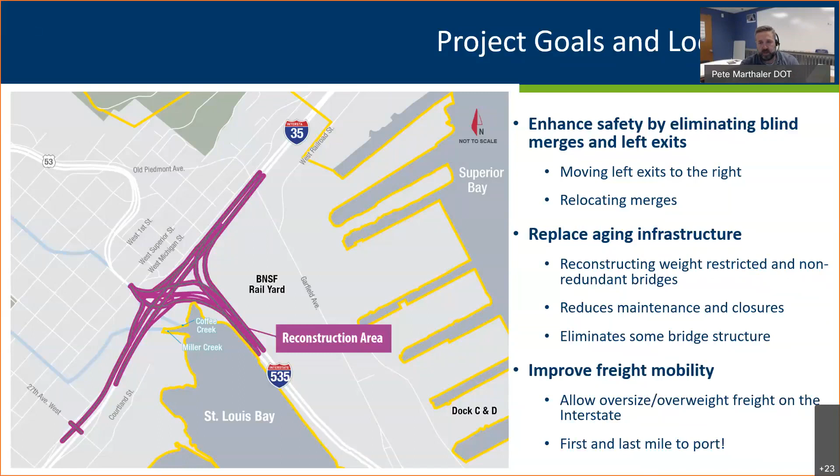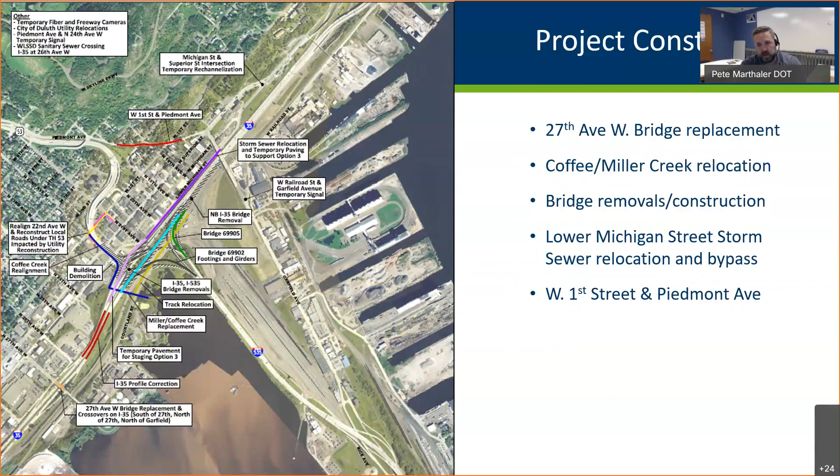Project construction will, for the first phase we're starting to see right now, include the 27th Avenue West Bridge replacement. We'll also relocate and combine Coffee and Miller Creek. We'll have some bridge removals that will start next fall, or major bridge removals that'll start next fall. And next summer we'll have Lower Michigan Street storm bypass and some small utility work at West First Street and Piedmont Avenue.

For work pack 2, as we see in the map here, a lot of the newer bridges will come online. Mainline reconstruction of I-35, putting in some ground improvements and retaining walls, and working through our stage construction to maintain traffic on I-35.

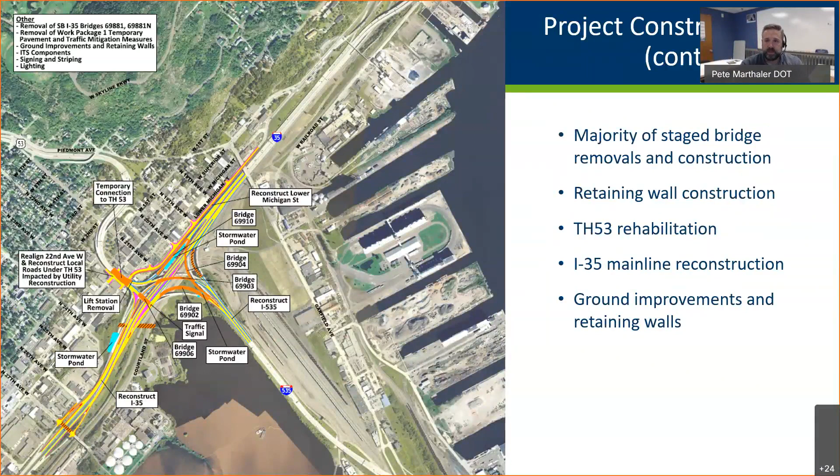So probably the reason everyone's here is they're looking to understand what our fall work is, and understanding some of the work that we have out there that's underway right now as we speak.

So our scheduled work for fall is 27th Avenue West Bridge replacement. We completed our crossovers on I-35 mainline last week, which is a good hurdle to get over, given that we want to be able to utilize those right away as soon as we start spring construction.

We're going to work on some railroad track alignment between WLSSD and the heart of the TPI interchange, and we're demoing some buildings that are in the way for our spring construction.

We'll start with some bridge foundations in the main heart of the interchange, represented by those red dots you see down here.

And we'll start building our soil stockpile sites. As we have a significant amount of contaminated soil, we're managing that and identifying what we are allowed to reuse through the PCA. So we have to have some temporary stockpile locations around the vicinity. We're going to get those lined up and built so they're ready to go come spring.

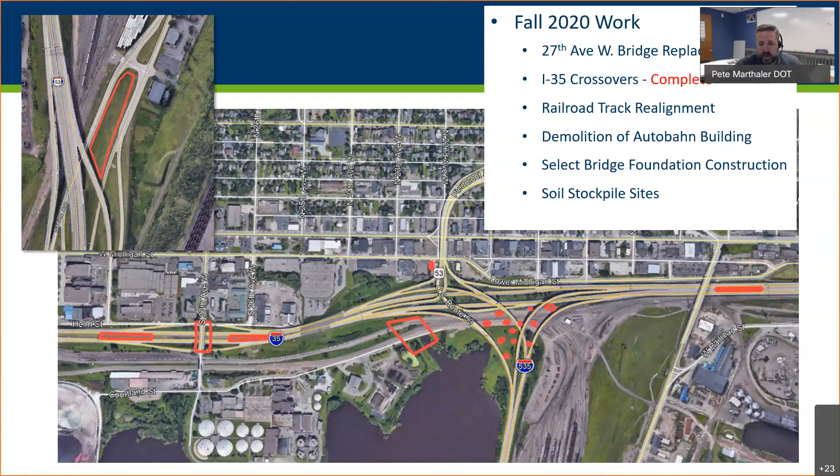Touching on the crossovers again, if you've driven up and down the freeway, you've probably seen the work that we've completed over the last 2 weeks. The nice part about it, at least I can speak about today, is that we have southbound traffic open to 2 lanes in both directions. And hopefully by midweek this week, we will have northbound back open to 2 lanes.

We have some work going on right now at the 27th Avenue West Bridge, as well as some work going on the shoulder. If you can see my cursor here, circling the area off the right shoulder, northbound on I-35, that is also some temporary work that we're getting completed this fall to line us up to be in a good position come next spring.

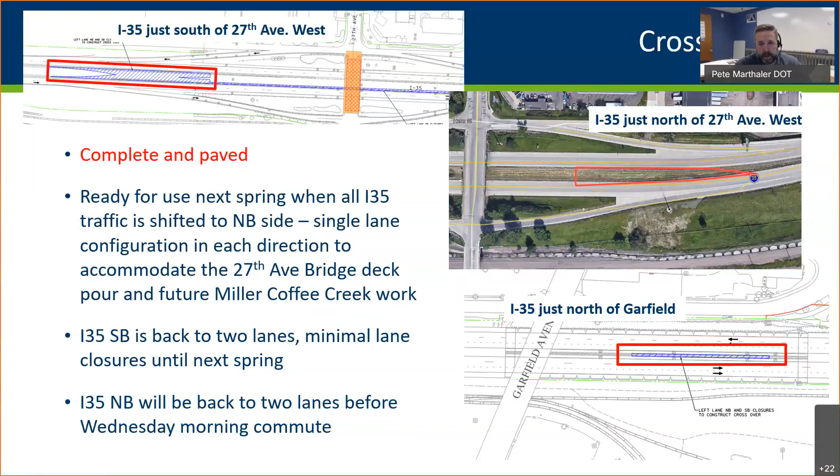Here's a picture of our crossover on the north side of 27th Avenue West, and our crossover under construction on the south side or west side of 27th West.

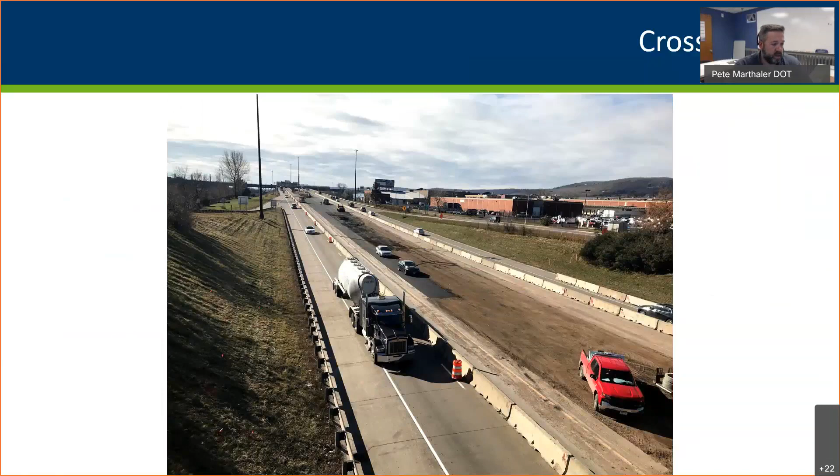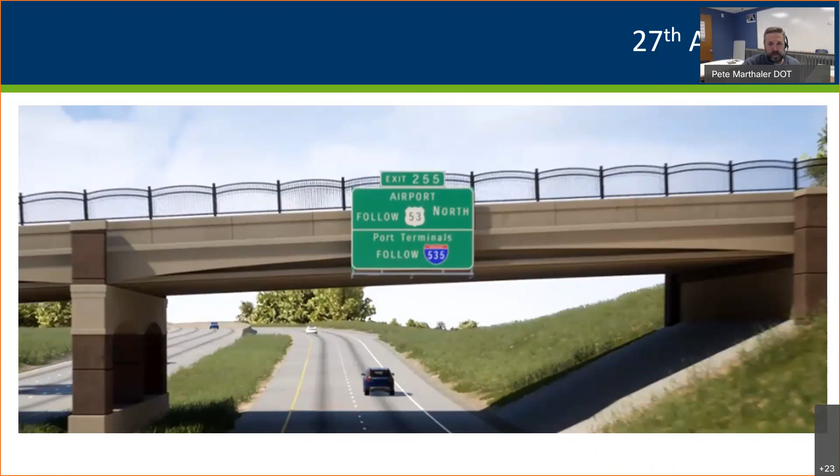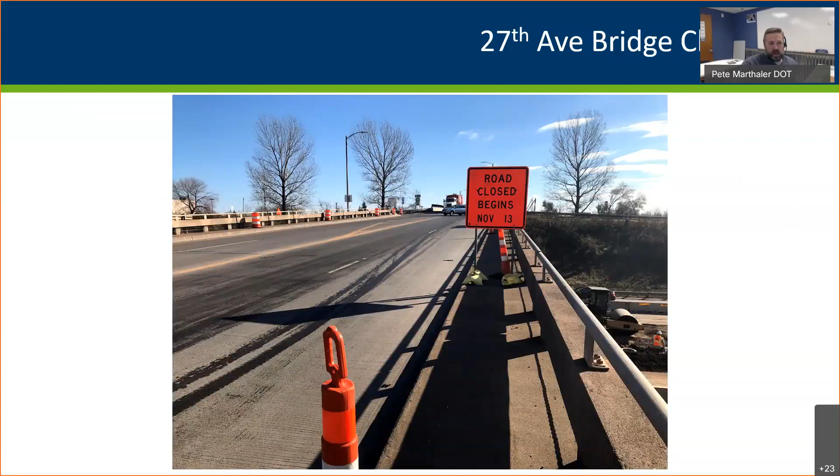So this probably is a good time as any now that I realize this. Steve, this is kind of what, good way to step through the stage construction. So you want to jump in? Sure, can you hear me okay, Pete? Yes, we can hear you good. Thanks, okay, no, thank you very much.

So I'll just talk about what we're doing here at 27th. For those that may have been out here this morning, we've got the two north side ramps, the northbound on-ramp from 27th Avenue and the southbound off-ramp from 27th Avenue, closed. What we're doing there right now is getting some temporary earth retention or shoring systems installed in preparation for the demolition weekend on November 13th. Those ramps will be closed for the remainder of this week to allow us to do that work.

There's also some temporary lighting that needs to get installed and rerouted. So there's some temporary poles that will get installed on the east side and west side of 35, and that's just to allow for some temporary lighting just north of there for temp widening work that is ongoing concurrently at the same time.

And then starting next Monday, we'll open the two ramps that are closed today and close the two south ramps, again to do the similar type work. We've got some temp lighting that we've got to install, and then some temporary shoring in preparation for the bridge removal starting November 13th. So we've got two ramps closed this week and the two south side ramps closed next week, and that will lead us into Friday, November 13th.

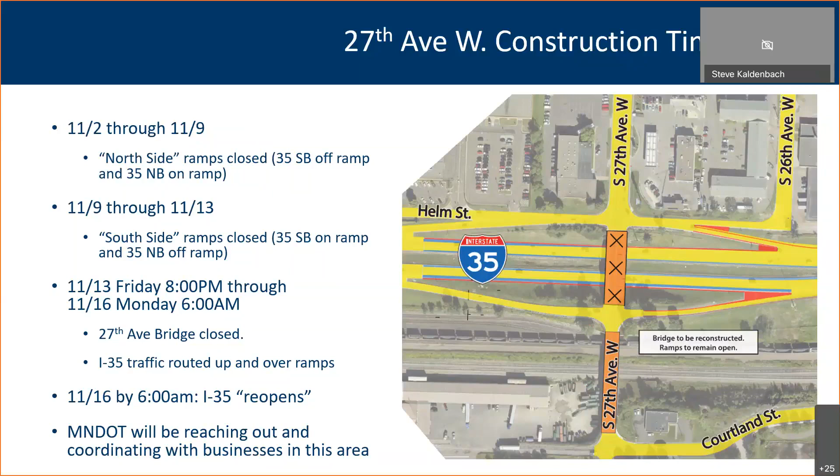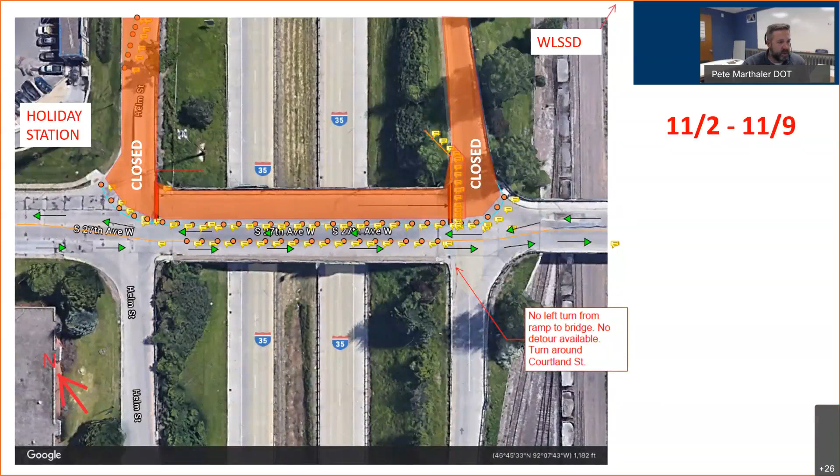So to put some pictures to words of what Steve was just talking about, this is the overhead view of the configuration that we have out there right now, and why we're closing. The orange area is the work zone that's underway right now, and the barrels, the orange dots, kind of delineate the traffic channelization that's going on. So this is what we'll see for this week, and then on Monday we'll flip flop them so they will look like this.

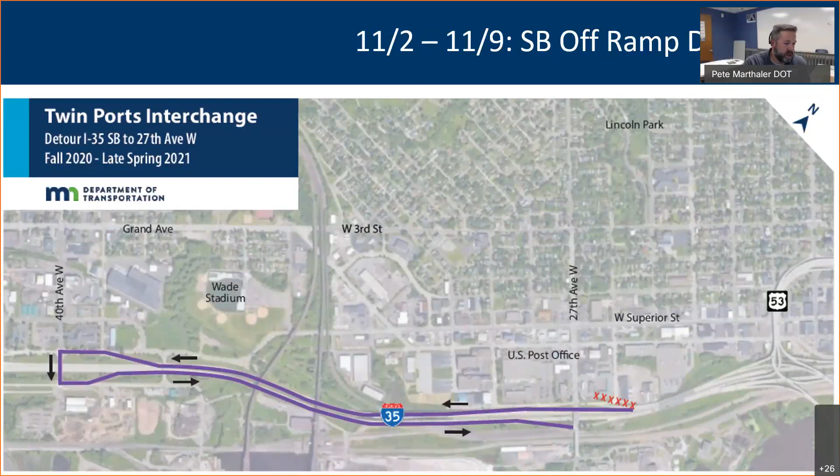And in the meantime, we don't have signed detours out there, but we're asking people who know where they need to get to, if you want to access the southbound off ramp detour, given you can't take the ramp off, go southbound to circle down to 40th and come back north, utilizing the northbound off ramp there. Likewise, given that we can't take the northbound, go northbound on 35 off of 27th, cross the bridge, go south on 35 and cross at 40th and come back north to resume their trip.

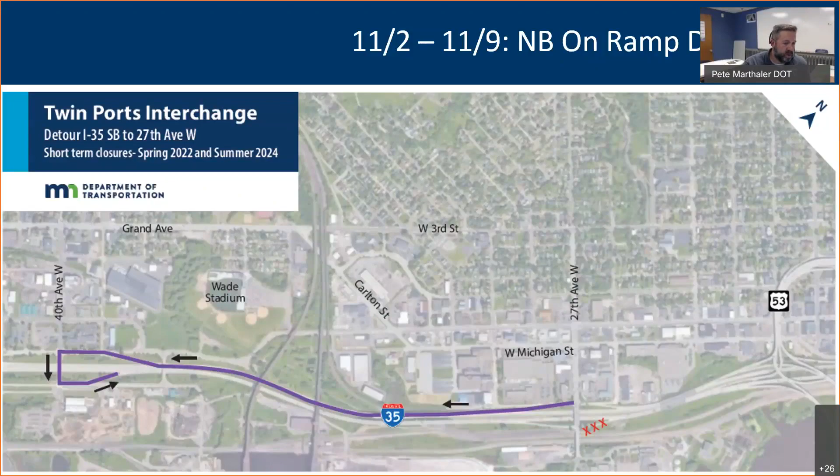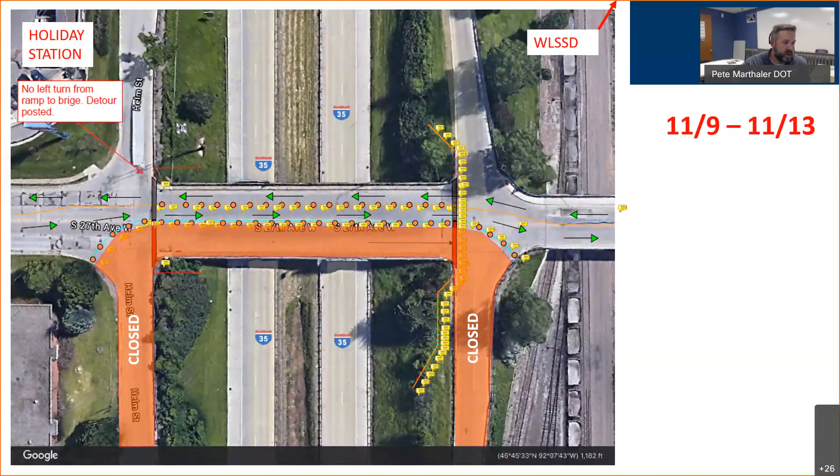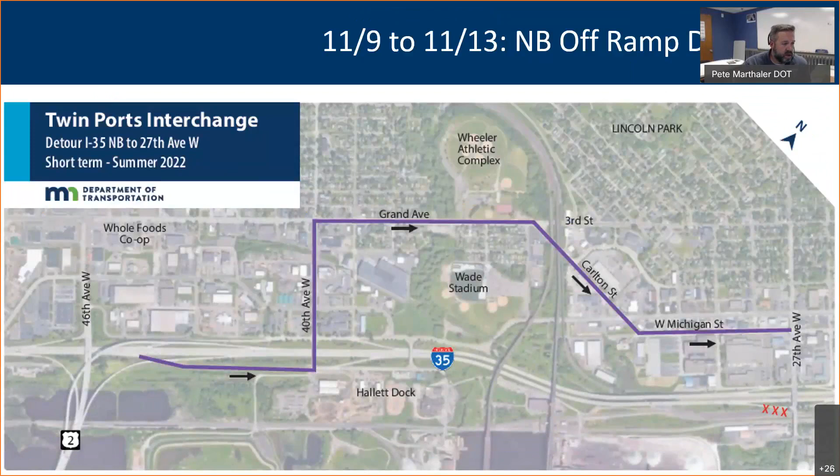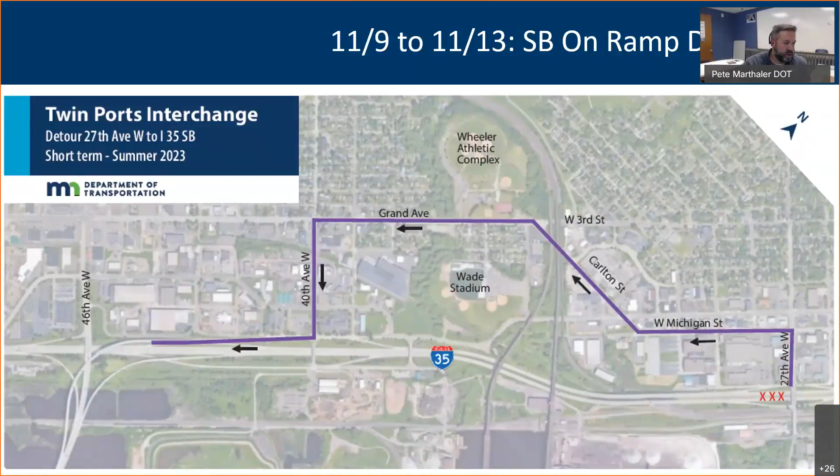We'll have detours out, or state troopers will be on site for probably the higher traffic time periods. We're going to minimize the conflicts at 27th West on the Lincoln Park side by closing the road essentially at the ramp to not allow traffic to enter the southbound flow at 27th West there. So I've already notified those businesses all through there between Michigan and the ramp. They were all very receptive, thankfully, and understanding a weekend closure definitely helps them at least minimize their impacts during the weekdays.

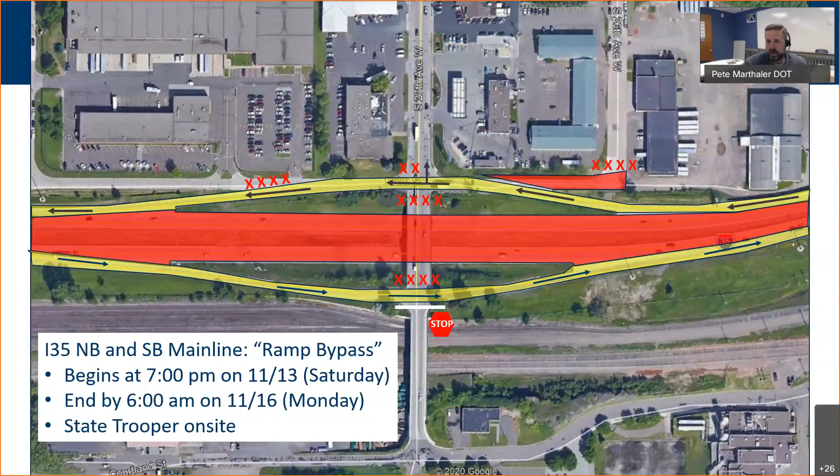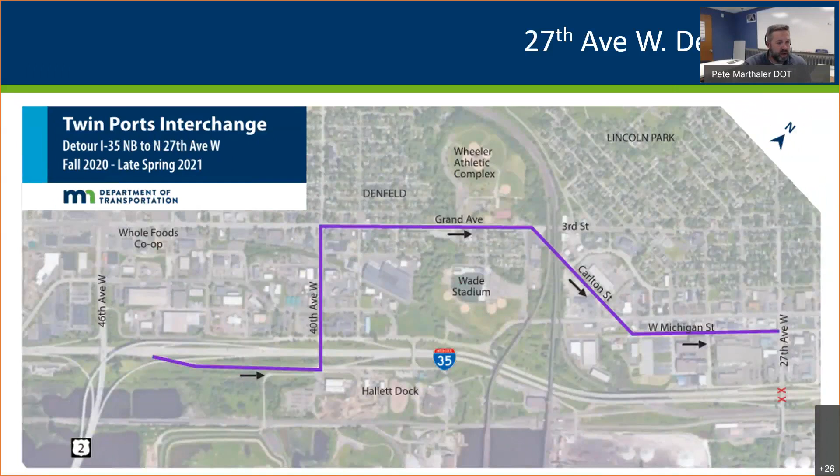Some detours that we're going to have while the bridge is out. If you're looking to cross the bridge to get to the other side, say over to WLSSD, just go south on 35 and circle back at 40th and come back. Additionally, if you're northbound and need to get to Lincoln Park, use the ramp at 40th West via Grand and Carlton and Michigan. For those looking to go south from the WLSSD side, we'll be able to go north at 35, cross at 5th Avenue West, and come back going south.

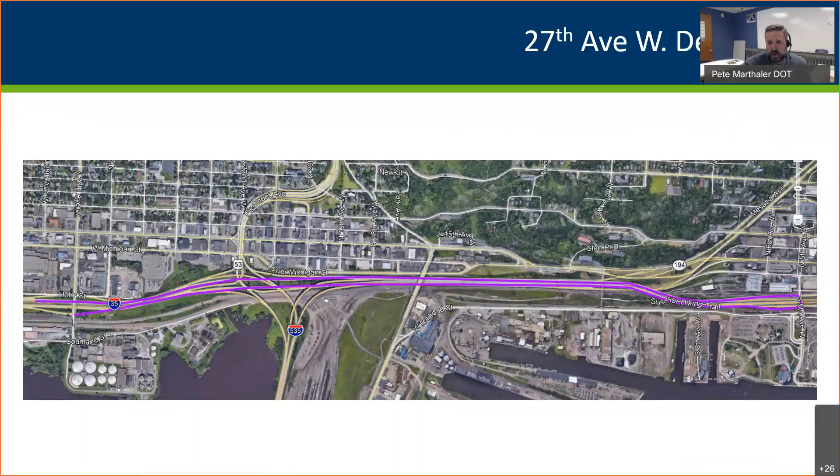This segues into other work we have going on that people will see that don't necessarily have traffic impacts, but nonetheless something worthwhile making progress out there. As I mentioned earlier, we're widening and putting out some temporary pavement just north of the northbound on-ramp to accommodate one lane each way come next spring. This is also the crossing where we're going to have our combined Miller and Coffee Creek, so we'll have a lot of sheet pile staging going on there in order to build that combined Miller Coffee Creek right through that area and still maintain traffic, one lane each way.

And then obviously here, if you've driven around, you'll see the crane boom sticking up in the air above the overpasses there. That crane is just sitting there for now, waiting to get going on some of the substructure units for the new bridges and new structures down in that vicinity.

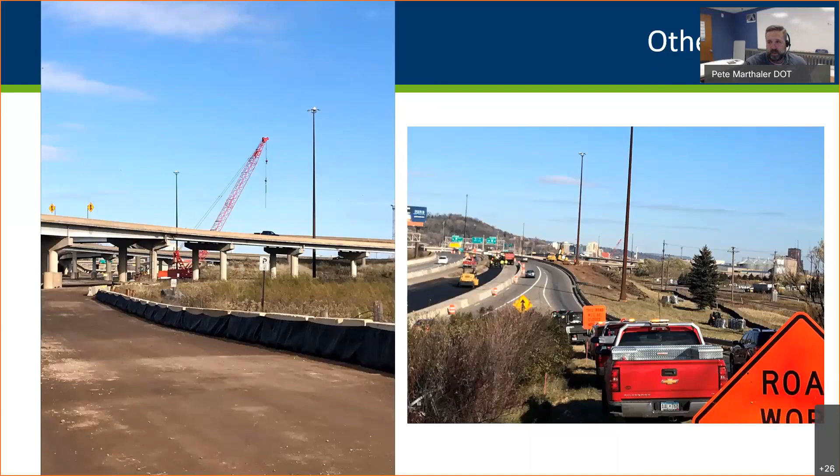Other work that will be underway that people will see in the next couple of days, we'll start grading for the railroad work. This railroad work is necessitated because we have temporary tracks we're going to build in order to effectively build the new crossing for the Miller Coffee Creek. For perspective, Miller Coffee Creek probably passes through right where Cole took this picture. So we have not only the interstate embankment, but we also have to navigate maintaining train traffic, which accesses the port facilities.

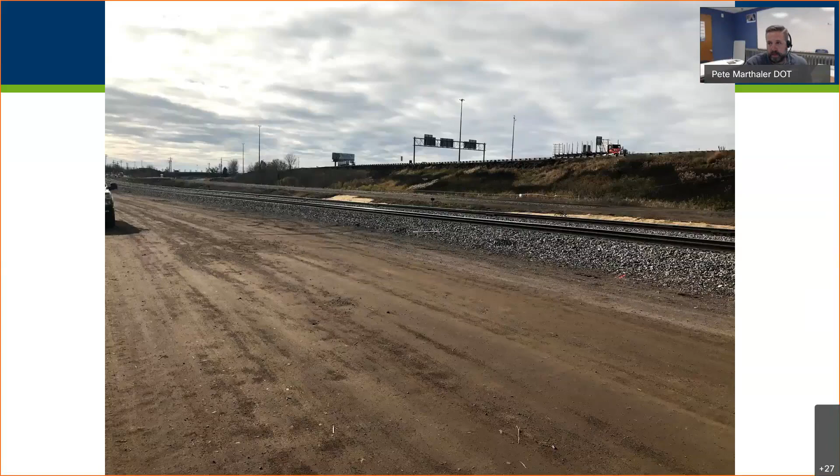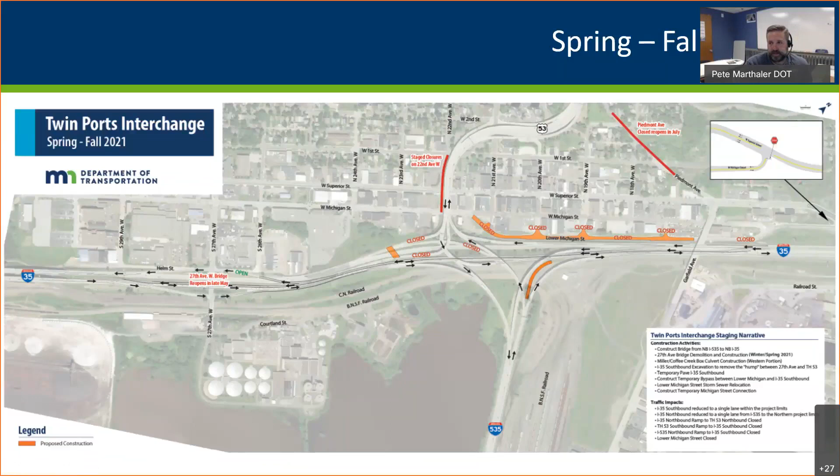When I talk to people in my daily life and mention what I do, I tell them that southbound 35 will be detoured down to Lower Michigan, and it definitely raises some eyebrows. So we included this graphic here just to paint the picture of what people should expect, what they'll see before it actually happens and goes into place.

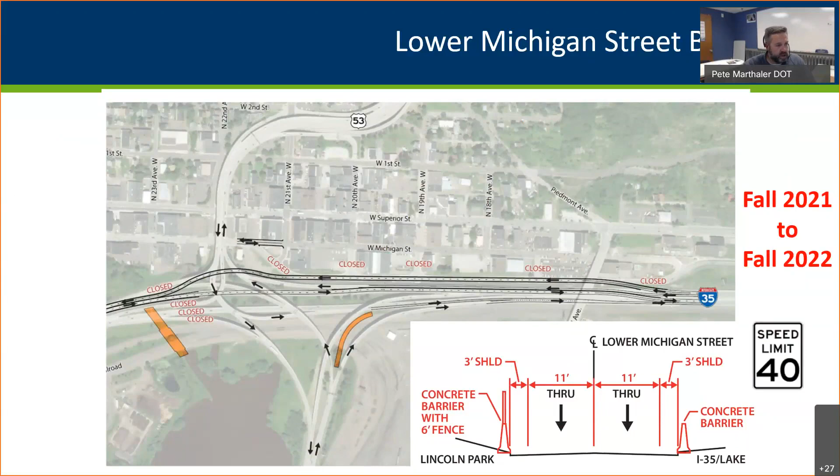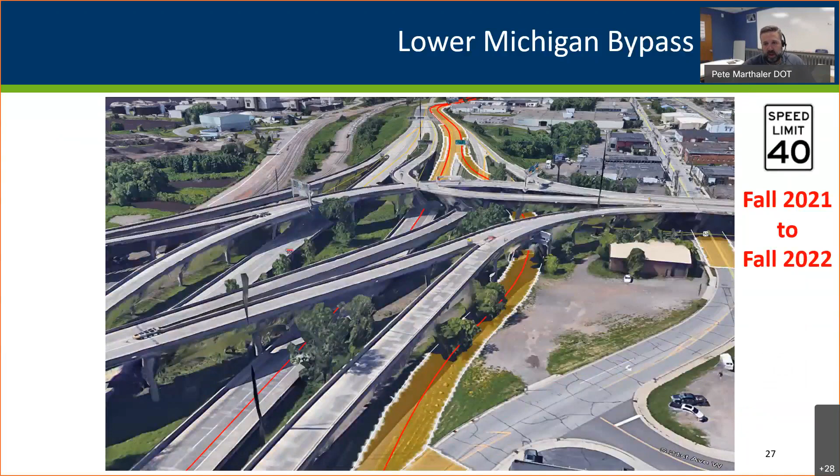This is a general alignment plan of what we'll put forth, a bird's eye view of the temporary alignment that it'll have. By the time this goes into motion, these overhead structures — I think they'll be the I-35 northbound to 53 northbound bridge — that'll be down, as well as the southbound 53 to southbound 35 bridge, which will also be taken down. That will facilitate this alignment coming through here.

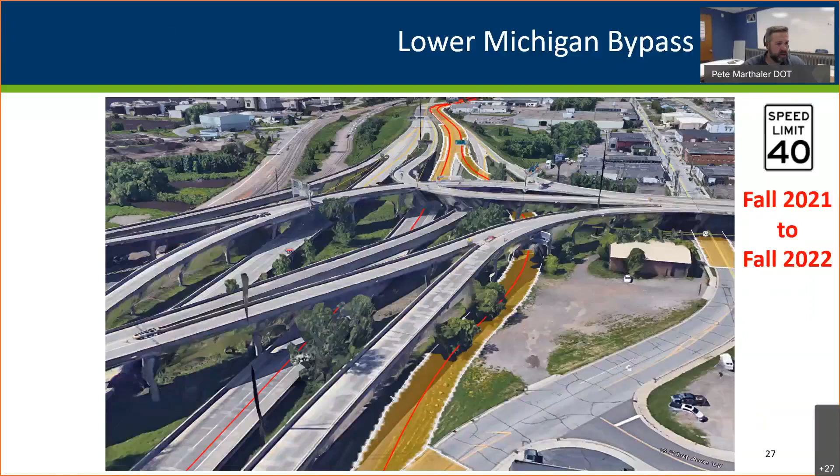This configuration will stay in place through the winter of '21/'22, and come fall of 2022, we will enter stage 4/stage 5 of construction and flip-flop traffic. So come fall of 2022, traffic will be able to drive on the newly completed sections of the TPI project, while we then tear into the second half.

Overall staging summary: we'll maintain two lanes of traffic after next summer to keep traffic flowing. The Lower Michigan Street bypass will reduce traffic trying to get through Lincoln Park, and year-round construction will help ensure we get this done as quickly as we can.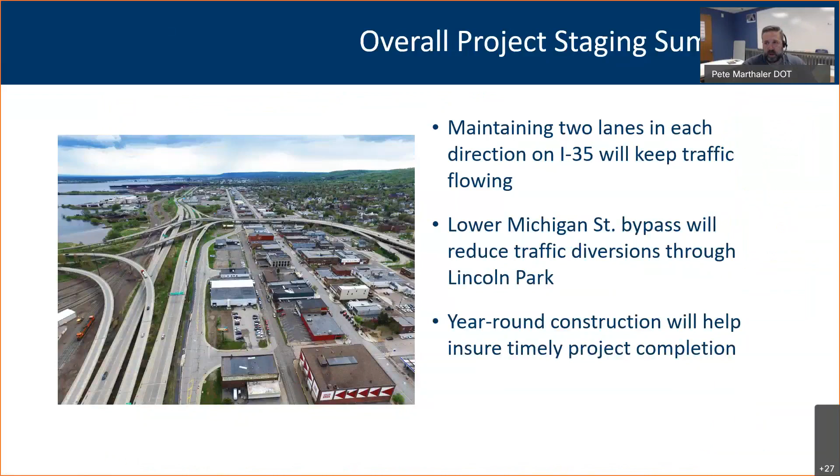Other work that's been happening, lift station work is largely complete. We're going to open Michigan Street, targeted later this week. If you're looking for more information, we have some YouTube videos out there on the lower Michigan utility work.

From a project messaging standpoint, we still have our billboards in place in Superior, down by Hinckley, and in downtown Duluth, right outside our project office. We still have radio ads going. We have our project hotline going, and as of right now, I've fielded only a couple calls on that, so that's useful and working.

In terms of posted videos, because we're unable to host in-person meetings, we're recording these type of meetings, as well as putting together some videos of interest. We'll have a new one coming out in the next couple weeks, which gives some good background on the combined Miller Coffee Creek realignment and culvert to outfall to the bay, and then virtual meetings like we're having right now. So we're just trying to do what we can to get the message out there so we don't catch people by surprise, but we still seem to. We're doing our best to get the message out there.